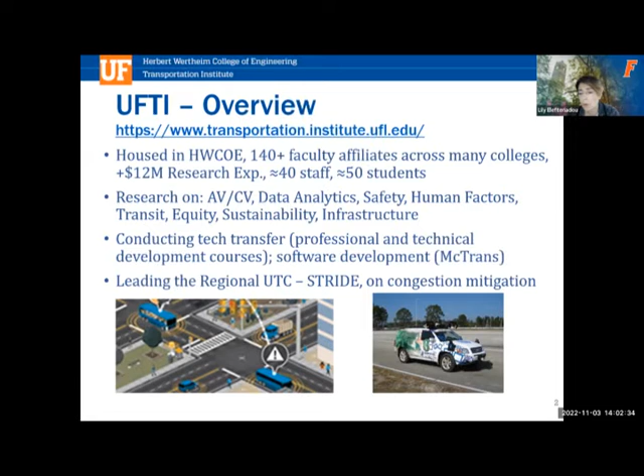We have 130 roadside units. It's a collaboration between FDOT and the city of Gainesville, and so we're working very closely with our partners. We have 60 vehicles that are instrumented and are receiving connectivity information. Those vehicles belong to UF Fleet, but also City of Gainesville and FDOT. And we have about 25 projects that either have been completed or are ongoing, related to different aspects of advanced technology.

So the main objective with I-Street is to improve mobility and safety. Our projects relate to applications of connectivity, applications for autonomy, advanced signal control, and other traffic management and safety topics. Some more information here about I-Street.

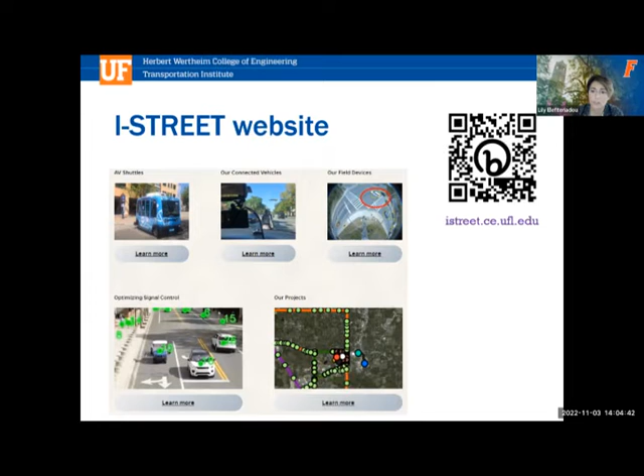One of our projects has been an autonomous shuttle, which had been operating in the downtown area. The project just completed in September, so we've been able to do some evaluations, both from a traveler perspective, but also from a traffic management perspective, and the way that the autonomous vehicle operates within city streets, and how other vehicles, but also pedestrians and bicycles react to it.

In terms of data, we are collecting data from several locations around the state, including around Gainesville, I-75 in Gainesville, the I-4 corridor between Tampa and Orlando, and also down in the south around the Keys area.

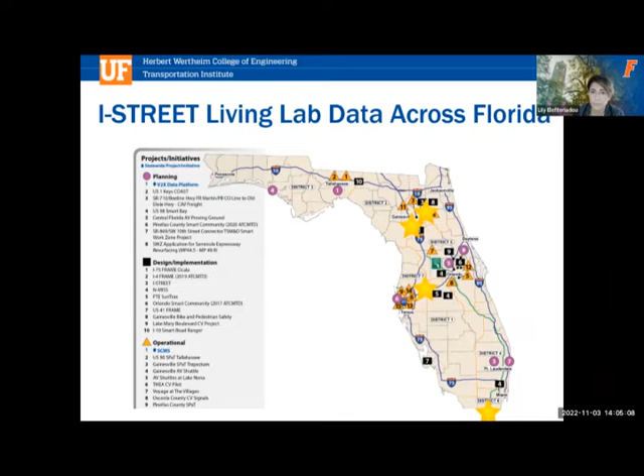That brings me to one of the major initiatives we've had, initially with funding from the National Science Foundation, but then with additional funding from FDOT, and with support from not only FDOT, but the city of Gainesville and a couple of industry partners, Econolite and ISS.

So the question that we are aiming to answer is how can we use autonomous connected vehicles to reduce congestion? That's a question that's been, you see a lot out in the press, but also in the literature. So we set out to develop a system with which we can actually improve congestion.

And the system is what you're seeing here on your screen, is collecting information from vehicles, including conventional, connected, and autonomous, but then developing a system where we are optimizing the signal control and vehicle trajectories jointly. And so with that, we're treating autonomous vehicles as robots and providing them instructions about how to move, but at the same time optimizing signal control.

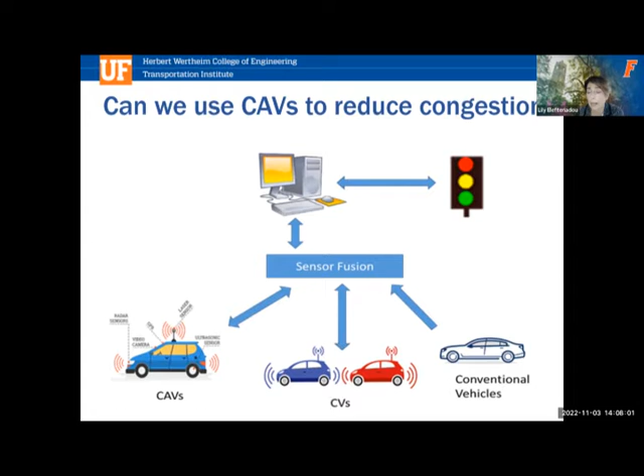So through our sensor fusion system, we are detecting the vehicles arriving at time t1, and we are able to develop optimal trajectories and project that to the time where those vehicles will depart. By being able to do that, we can minimize the number of stops, and we can have vehicles travel through the green. So the process optimizes signal control together with the trajectories of vehicles.

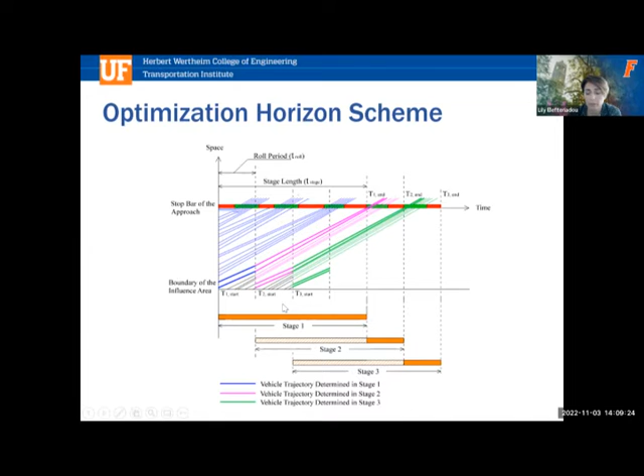One of the complications that we had to work through is we have to know the destination of the vehicle. It's important to have that in the basic safety message, because the destination also defines the way the trajectory has to be plotted, so the speed that it's going to be able to maintain going through the intersection and traveling to its destination.

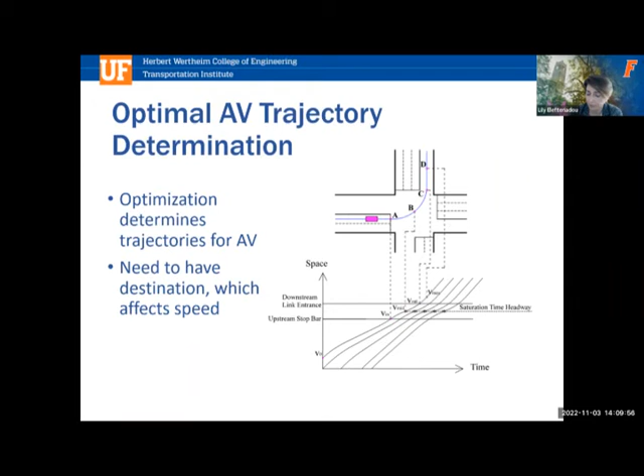Depending on the scenario, we can have delay reduced by anywhere from 16 to 79%, which is quite significant.

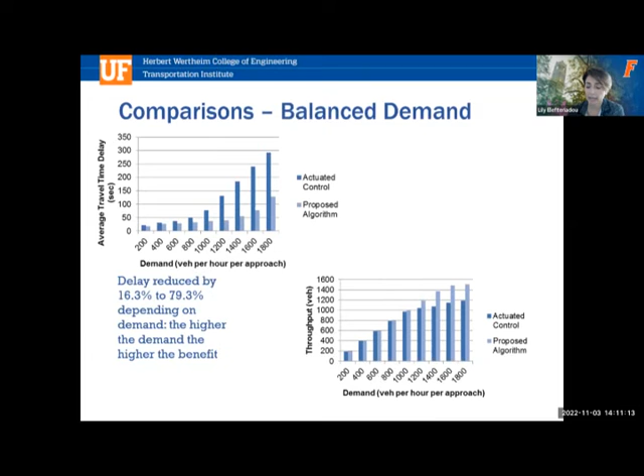Now we did that, like I said, with 100% autonomous vehicles in simulation, but then as part of our NSF contract, we had what's called the transition to practice. So we developed a system to do this actually in the field.

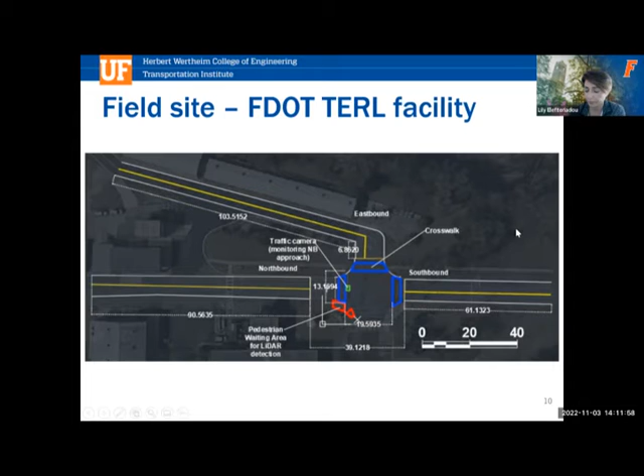One of the lessons from field testing, which is quite different from simulation: in simulation, you can create the vehicle arrivals in advance and develop your algorithm the way that you want it to operate. But in the real world, you don't know the rate at which vehicles will arrive.

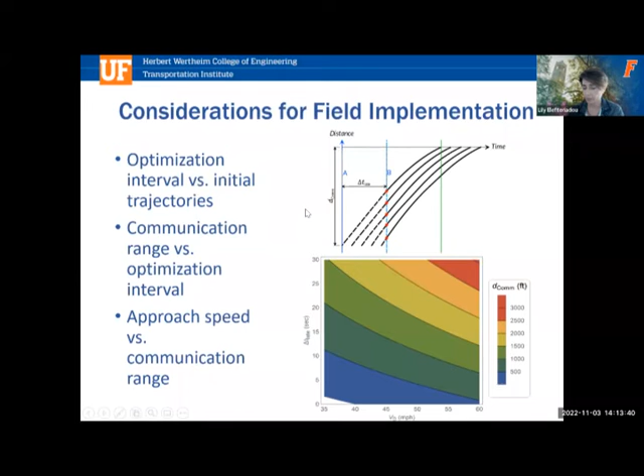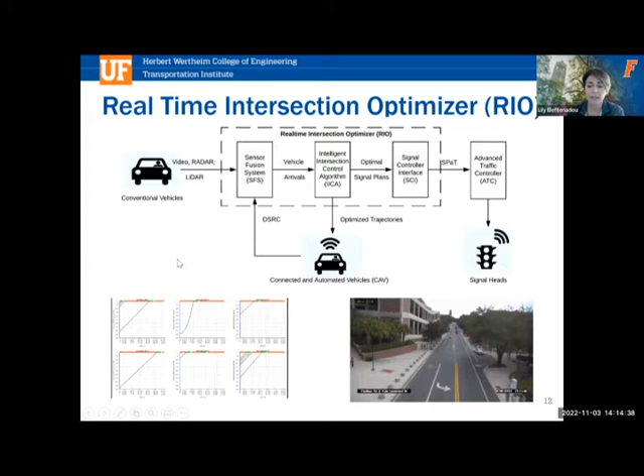For example, at the bottom left here, I'm going to run this so you can see, the dots here represent the optimized trajectory, and the solid line represents what the vehicle is actually doing. So we're able to look at the guidance that we're providing to vehicles versus what it is that they're actually doing.

I'm going to show you a little bit of the types of sensors that we've been using, video and radar. We've used LiDAR also, because one of the additions we've made is to detect pedestrians. The intersection I showed you earlier is on the UF campus, and there's a lot of pedestrian traffic there. And the DSRC unit, which we're actually having to replace with C-V2X type equipment.

Again, here is the video just showing this is the intersection we have instrumented. It's outside the civil engineering building in Gainesville. The football stadium's here on your left. And so the intersection now has a set of sensors that we're looking at, and we've done experiments for vehicle trajectories.

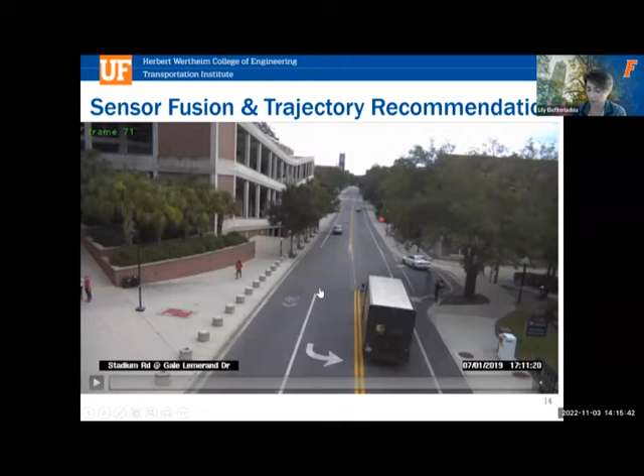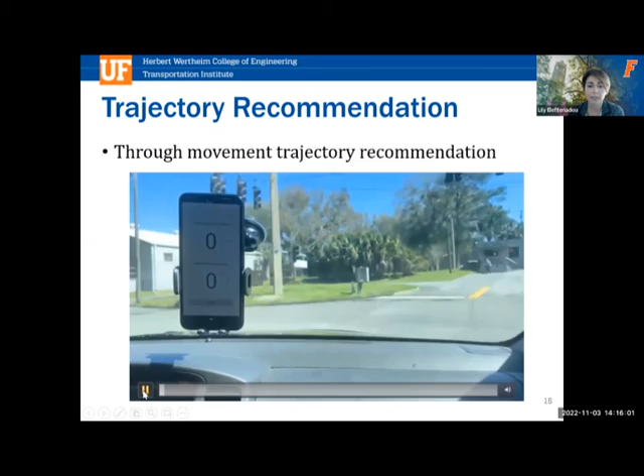I also want to show you part of the project. We developed an app that any vehicle, even conventional vehicles, would be able to use. So what you're going to see here in the video is as the car approaches the intersection—this video is actually taken at the TERL, so it's a closed course facility, not an intersection with regular traffic.

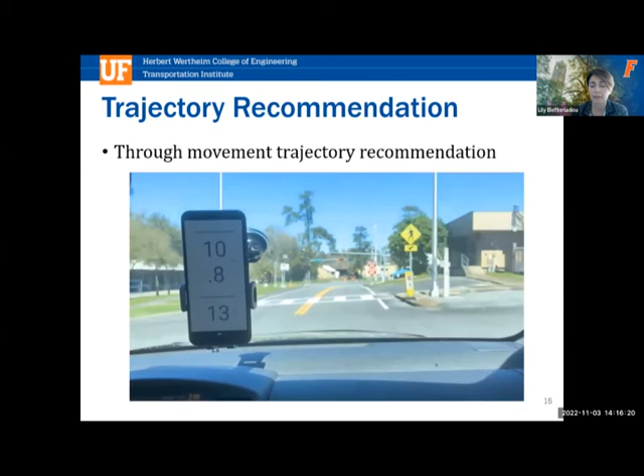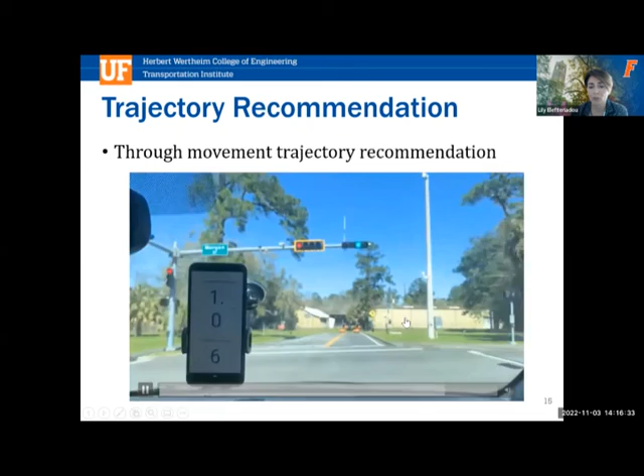It's starting to provide some guidance to the driver. Now, we didn't have drivers outside our researchers, so the app is very, very crude. We weren't aiming to do a human factors project. I think this would be a very interesting extension to check and see what type of information a driver would want to see and how they would use it depending on the circumstances.

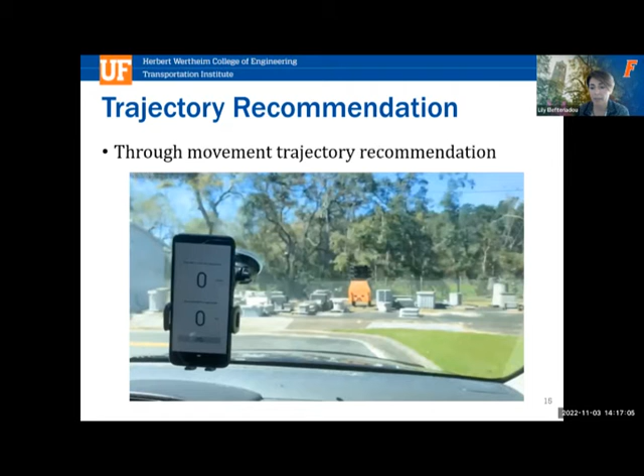But we wanted to see how feasible it would be for a driver, one of our researchers, to follow the recommended trajectory. So we experimented with optimal speed, so a speed recommendation. We experimented a little bit with time to green and things like that. And then we also compared different types of trajectories based on the fused information. We did several different experiments with what would make most sense in terms of the type of data being included.

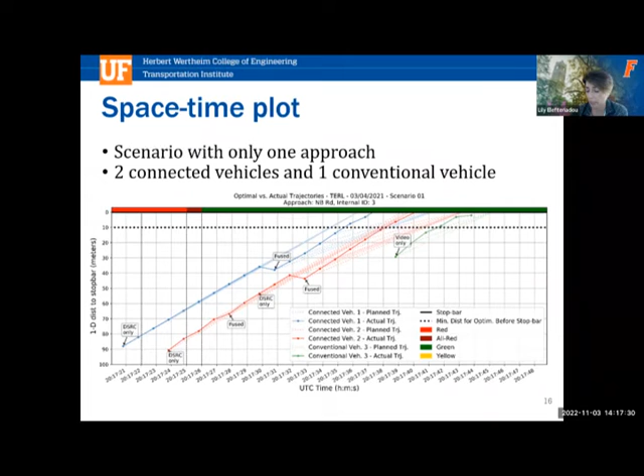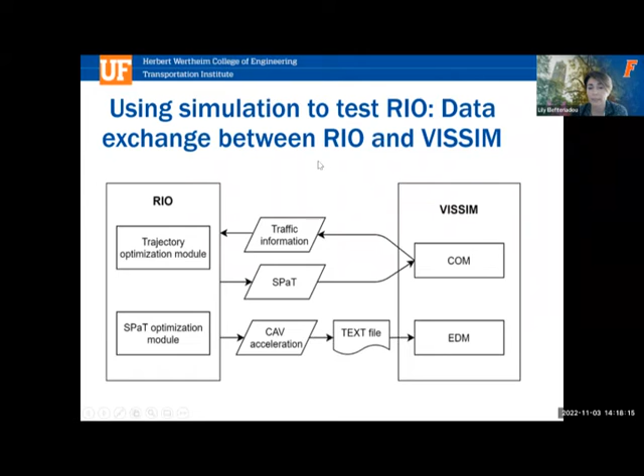The other component we've been working on is a simulation platform. We have connected RIO to VISSIM, and that allows us to do more extended experiments with conventional vehicles using VISSIM's logic rather than us having to rebuild all the car following, lane changing, and all that. The platform is working right now. We actually have a paper to be presented at the WSC in Singapore in December this year. This was not trivial—we thought it was going to be easier than it was, but in the end, it works.

Another extension we're working on right now, we just published a paper on that, is the extension to arterials. That becomes a little bit more complex because of the offset between the two intersections and coordinating with the side streets as well between the two intersections. We published a paper on that at the last TRB.

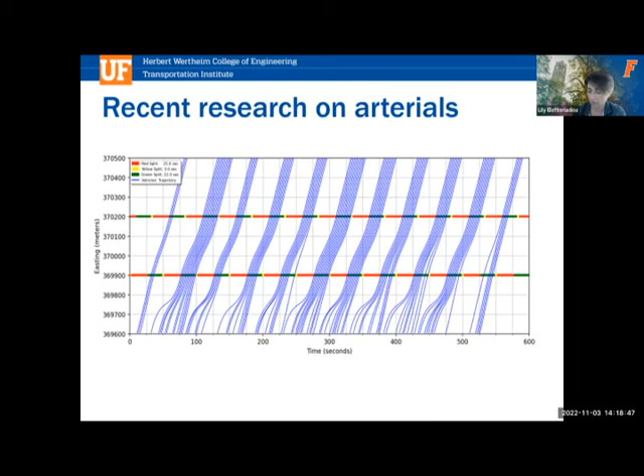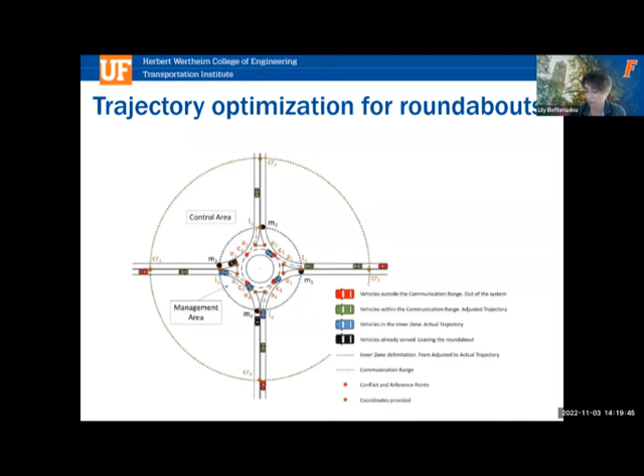Now, for this one, the experiments we've done, the simulation experiments we've done, are 100% autonomous connected vehicles.

And so you have many more gaps and much more productive, if you will, freeway, because otherwise, if you rely on human drivers, and depending on what happens downstream and upstream, you don't have good utilization of the freeway. This was work by Clark Letter, one of my PhD students, which we published. We're doing some extensions—we've done an extension to weaving, and this was primarily for merging.

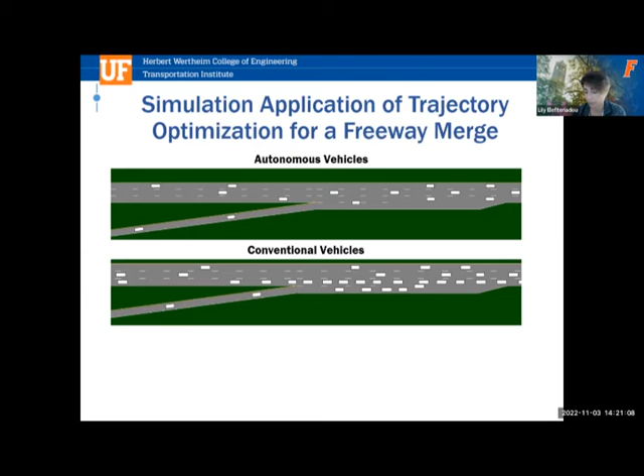So where are we next? We're expanding our simulation experiments and working on improved sensor fusion, sensor capabilities, and telecommunication. This is one of the main reasons the system is having a hard time - the accuracy of the sensing.

The simulation can work well. It seems that we do have improvements in travel time and throughput, even with a mix of autonomous and conventional vehicles for the applications we've tested. We plan to do more experiments with the mobile app, especially the interface and the type of information that drivers may react to more effectively.

And lastly, the computational efficiency. There's a lot of work we're doing to make sure the processing is faster, because one of the things that happens in our applications is when we consider combined autonomous and conventional vehicles, you have to take into account that conventional vehicles may not do exactly what you want them to do. So we can't just rely on having an optimal trajectory given to the vehicles. You have to go back and see, well, have all the vehicles done what you expected them to do? And if not, what needs to be readjusted?